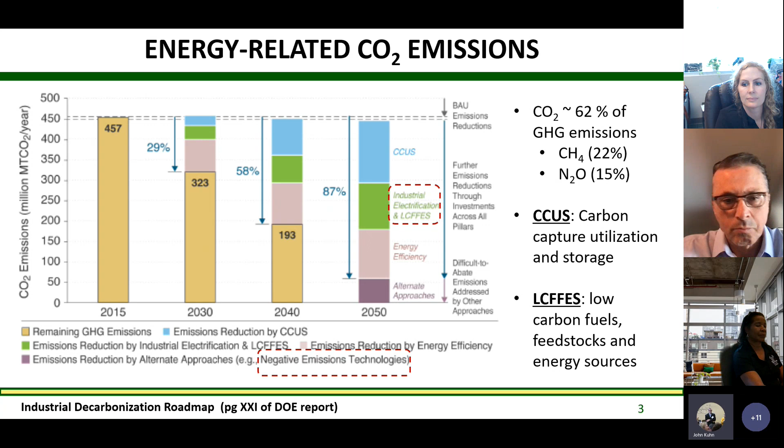One way we could go about this is with negative emission technologies. George and I had a project looking at biomass to biomaterials—carbon-based sorbents from biomass, or ways to make materials out of carbon that would otherwise be in the atmosphere, reducing overall carbon emissions in a negative sense. So there are some interesting things you can do there.

This shows the breakdown by industry of where emissions come from—chemicals, refining, and a lot of manufacturing are among the top several. These are all industrial type things, usually large scale facilities where you can have a big impact if you can apply technologies there.

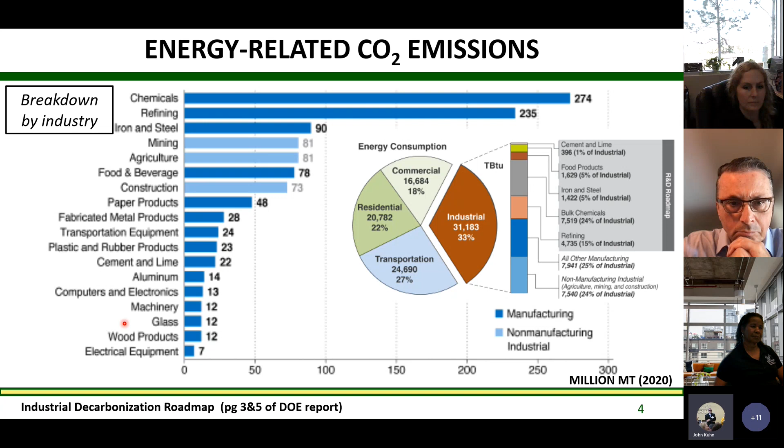But there's also a number of other things down the chain where you can have impact on overall CO2 emissions. They're not necessarily what we think of as either industrial or transportation, but a lot with commercial and residential parts. So there's a lot of work that can be done with these areas.

One thing that comes up a lot is the hydrogen economy. That's another report that came out recently, and they update these quite frequently. The main idea is grid-based electricity with renewables, or fossils with carbon capture, making hydrogen and having that hydrogen replace hydrogen that would typically come from non-renewable sources like natural gas. That'd go into making ammonia or fertilizer or fuel upgrading, or just replacing this with carbon from CO2 for the carbon backbone of things like transportation or synthetic fuels.

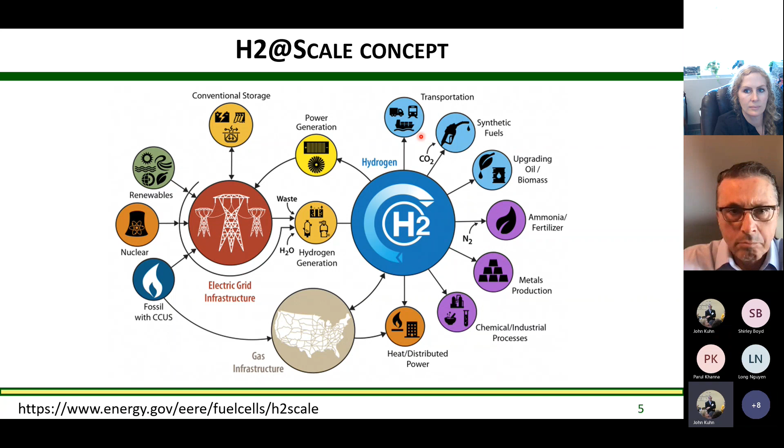It's kind of an exciting time at some level with these things, but there's still a lot of challenges for us to solve. My background is in catalysis, so I put a few slides in here, since I think much of the audience isn't going through these things frequently. But a lot of products we use, or most products we use, have a chemical catalyst used at some stage in their manufacturing. If you think of any polymer or any fuel we use, they all have catalysts used at some stage in production.

So you can improve the catalyst, which usually lowers the energy needed for either the conditions or the separations, or increases how much yield you can get per product or per feedstock you're making. There's a lot of impact catalysts can make.

What catalysts do is change the activation barriers between products from different reactions. Here's a textbook case: you have a reactant, and these delta G's are the activation energies. If those are lower, the reaction is more likely to go to one product or another - product one or two here. This is showing, for example, where one of them is 18. If you can just change this by 1 or 2 relative to each other, you can shift the selectivity, mostly from one product to another product.

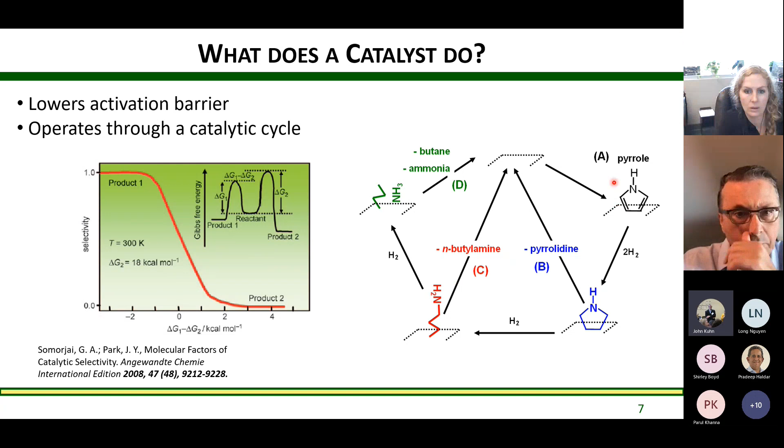And that's how these things become useful downstream, because it simplifies the separation and things like that. They also go through a cycle. This is a generic case from a publication I had earlier - you have the surface with an empty site, it adsorbs something, goes to a different product and a different product, and each one makes a circle to go back to the empty site. So it gets used every cycle, but it gets regenerated, and then you get whatever product - in chemical engineering we just call them letters typically, A, B, C, D, whichever one you want.

Catalysis has had a large impact - several Nobel Prizes have been won for it over the years. The most recent one is Gerhard Ertl, about 15 years ago now, from Germany. One of the things he won it for was understanding the fundamental catalytic chemistry of ammonia synthesis. After he won that award, he wrote a paper referenced at the bottom here, making the case that the population increase over the last 100 or so years was related to ammonia production from the Haber-Bosch cycle, enabling us to grow crops more efficiently per land area to support the population base.

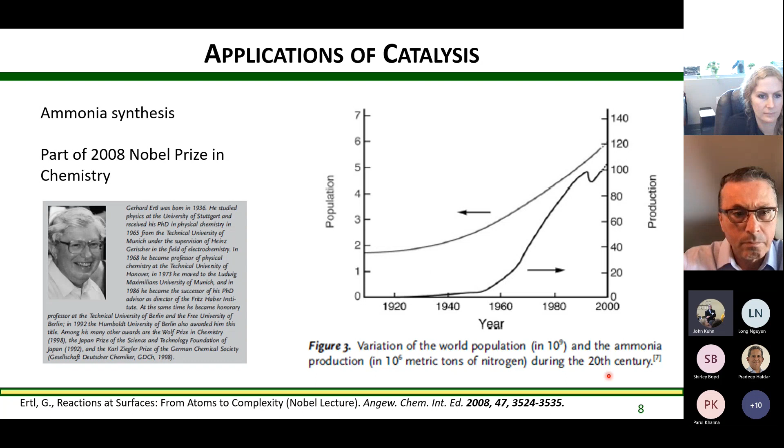So let's look at the big picture for a lot of these things in chemical engineering. At least we're trying to take cheap and abundant feedstocks and make products out of them, and we're focusing on this reaction step primarily. My main part I'll talk about is the catalyst for those reactions today.

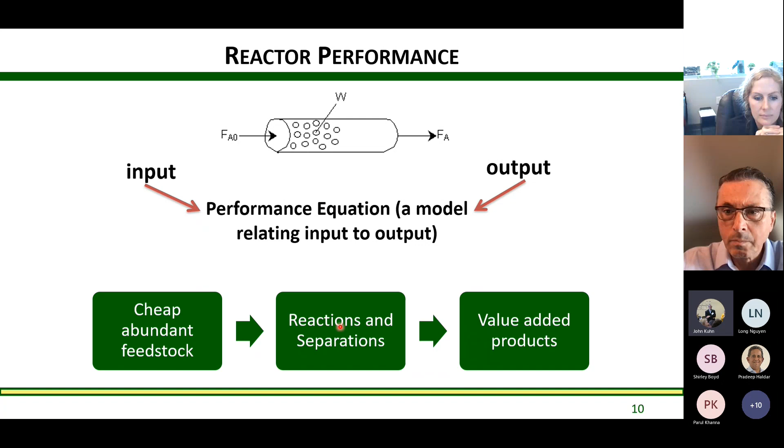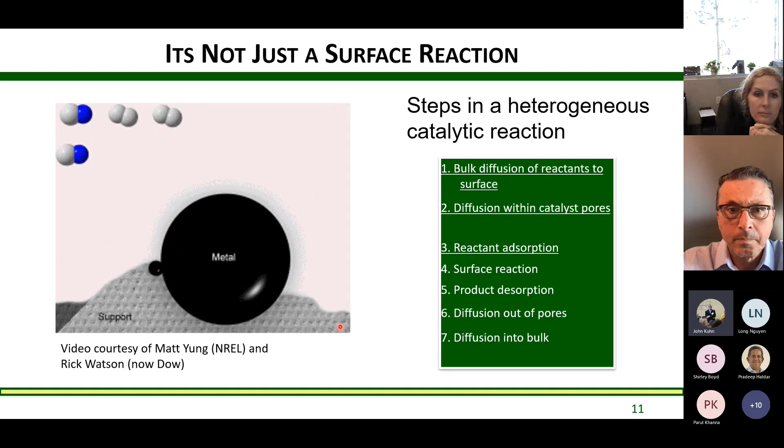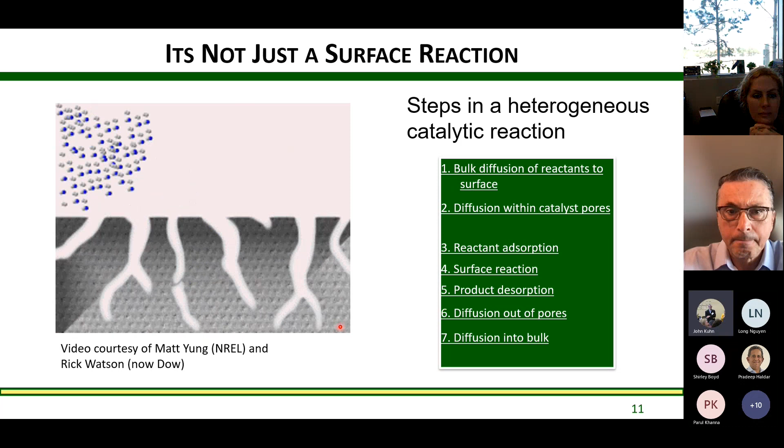These are solid materials, so there's a lot of chemical steps taking place, all at very small scales. This shows a depiction of how reactant molecules can diffuse into small pores, hit metal sites, react, and then diffuse back out. We're often studying a set of these relevant time-frame steps in our lab, usually on the small scale, and when we find successful things, we scale up to the next level, which I'll talk about later. Feel free to type questions in the chat as I go through this.

One area I mentioned was direct CO2 conversion. That's been an area we've looked at in the lab, with the idea that the hydrogen would come from electrolysis from renewable fuel sources. We've been working on complex perovskite-type oxides for this, where they can convert CO2 to CO, which you could use as a feedstock for different reactions to make any hydrocarbon product out of it. It basically stores the energy in hydrocarbons from intermittent sources like solar or wind that would be making hydrogen from water, so you get a closed carbon loop.

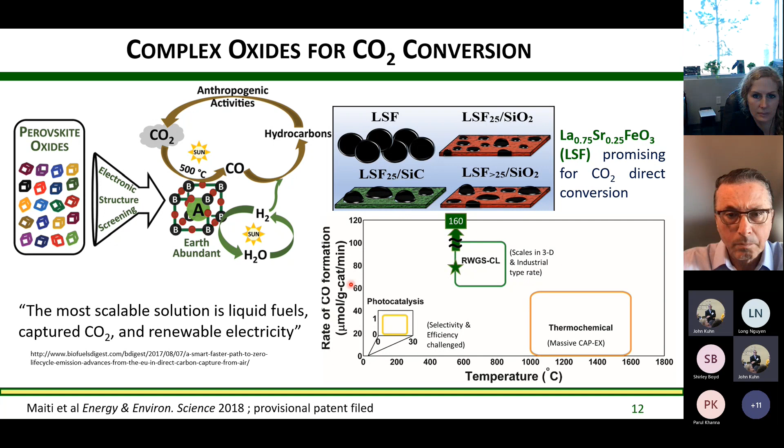This is one of the big challenges as we move toward reducing carbon emissions directly into products. Our technology is shown in green here, which balances conditions—how much energy input and thermal needs you need to balance versus what rate of product you get. That's one active area that Venkat Bhethanabotla in my department and I have been active in over the last 5-10 years.

I mentioned photoelectrocatalysis, another area I've dabbled in. This is interesting in that instead of using thermal energy, for the photo part you're using light energy—direct sunlight as the energy source—such that you can bypass heat-based processes where you have a lot of intrinsic heat losses. This is more futuristic, but ideal as we move toward low temperature processes that can be operated intermittently off renewable energy or electricity sources.

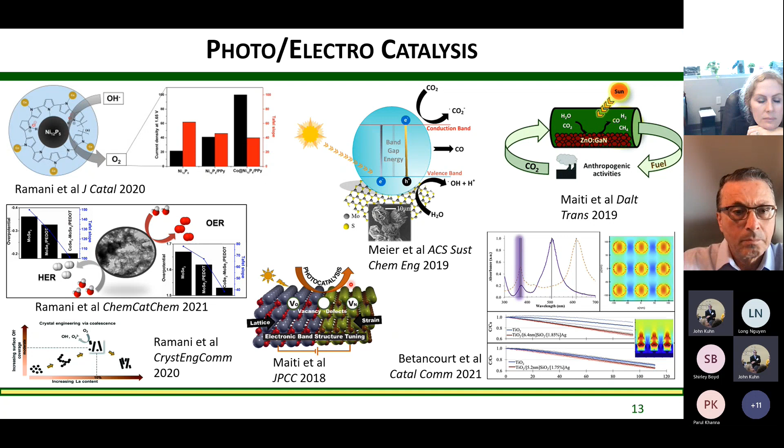That's another direction where the field will probably be moving much more in the next 10 years or so. That gives a little background about what I've been up to, and for this I'm going to spend the next half hour or so talking about biogas and what we've done in that area.

Biogas is shown here—it's about half methane and half CO2 on a molar volume basis. The good part is methane is a nice chemical to work with, relatively simple compared to all the complex crops you might work with for biomass. The downside is gases are usually much lower concentration than solids or liquids, so you're working at smaller scales, and you're basically working at half the energy content of what a lot of people try to do with natural gas, since it's only half methane instead of mostly methane.

So you have distributed biogas with only half the energy content, so there are challenges trying to do chemical conversion of this compared to using fossil fuels. The upside is we're trying to make diesel out of it, and very often this is made at places that use diesel, so there's a chance for a circular economy. Another upside is since it's distributed, these are often smaller scale, so often they're being flared just to prevent methane from being emitted into the atmosphere. So there's some low-hanging fruit to make chemicals out of this, since energy is being wasted anyway.

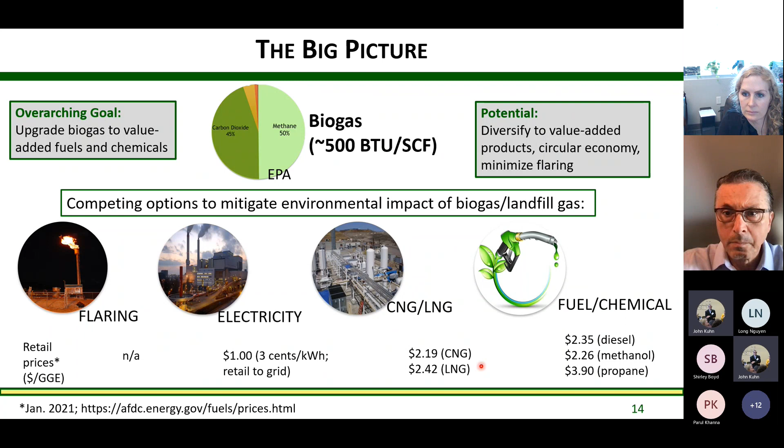Very often there's some challenge with this. So one reason why we have a lot of biogas in the United States is food waste. This term here, if you're not familiar with it, is organic fraction of municipal solid waste. The U.S. generates about 350 million tons of waste, depending on which source you look up, EPA or the Environmental Research and Education Fund. They're different by a certain amount, but about 25% of that is food waste and yard waste and other organic compounds, and they decompose when you bury them in the landfill, becoming anaerobic when you put the ground cover on them. So this is where all this biogas comes from.

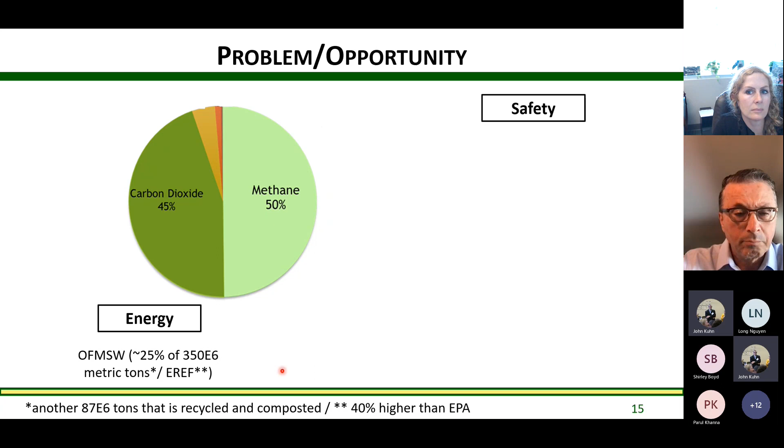So there's a large opportunity from the energy standpoint that could come from this. There's also safety concerns, since you have methane coming out of the ground at these places, which could cause fires. Landfill fires are fairly common, so it's not the safest thing. The other part is the environmental aspect. Landfills are not the top, but one of the top sources of methane emissions in the United States.

Another challenge to look at is what the contaminants are in landfill gas or biogas. There's some listed here. Primarily for what I'm going to talk about, hydrogen sulfide is one that's a concern.

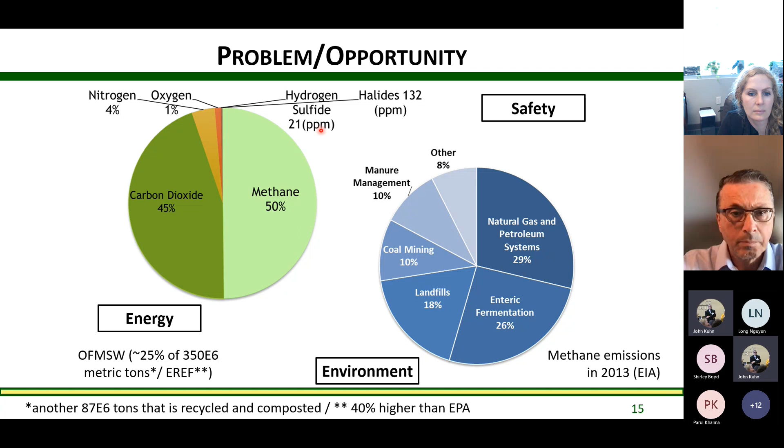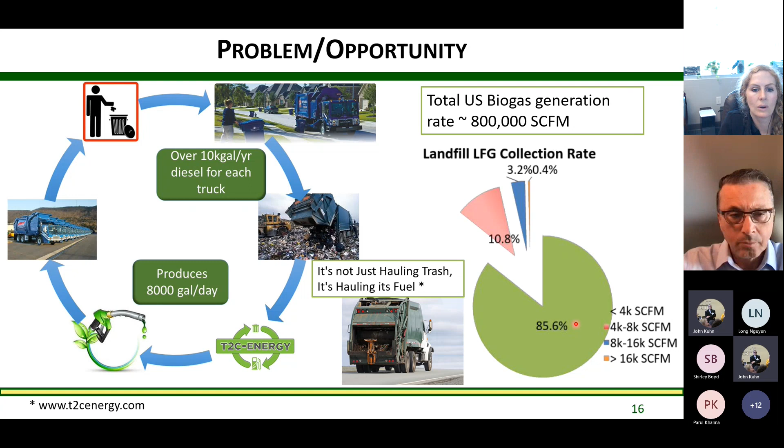And so I mentioned the circular economy. This just shows that in a little bit more detail from what we present sometimes for the startup company. Very often you're hauling the waste, and it just goes around the circle. You can have the source where you're collecting the waste, which is where you might be making the fuel and also restocking the truck. So there's potential there for a nice close-knit market. A lot of these are small scale, on the order of 4,000 SCFM or lower. Other places you get biogas would typically be ag waste facilities, which would also be very diesel heavy, and wastewater treatment plants, which again would be a place where diesel fuel could be distributed from.

Plastics and microplastics in waste has been in the news quite a bit lately. I'm only going to cover a few things here. If you want to get more into how much plastic has been generated and wasted, this paper came out a handful of years ago describing how much plastic has been produced and how much was going to be produced. These numbers seem gigantic, but I'll put this in comparison to diesel fuel in a minute. The sad part of all this is only 9% of all these plastics have been recycled, and most have been landfilled. Very little of it is biodegradable plastics.

The reason I put this in context is because sometimes it's hard to compare these scales. We're talking about 8,300 million tons versus 100 million barrels of crude oil per day. That's roughly how much is used in the world, 25% in the United States. This ends up being about 4,500 million metric tons per year of liquid fuels being used from crude oil - that's per year. This is like the history of plastics, and they're about the same value. So just how much fuel has been used ever, and all that's been burned, the CO2 ends up in the atmosphere is just a gigantic amount. And again, very little of it has been renewable fuels to date at this point in time.

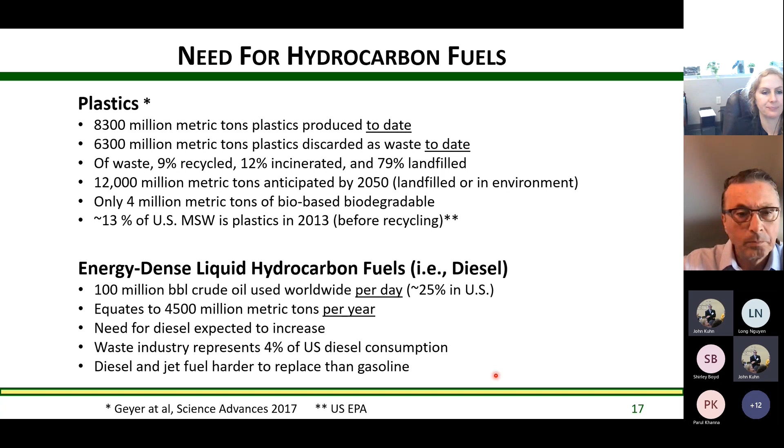And the big topic right now is SAF, sustainable aviation fuels, and that's one step harder than diesel, just due to the complexities of the fuel.

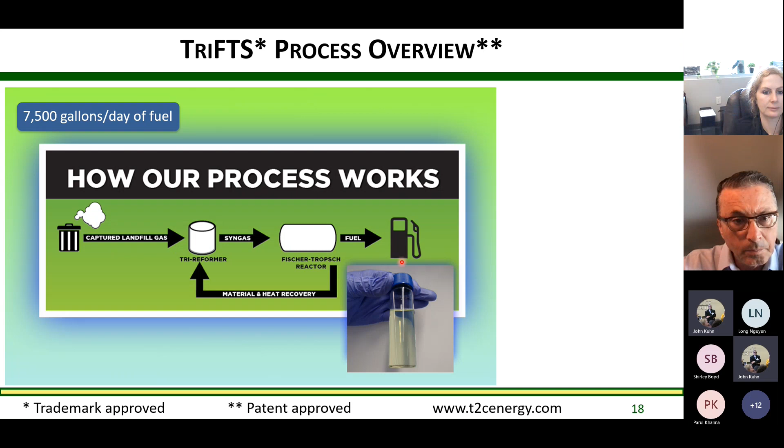So what we're doing is taking that captured biogas and doing a two-step process to upgrade it to diesel fuel, with some heat and energy recovery. I'm going to go through the cleanup step, these two reactor steps, and the final product, with a few more details in the next few slides.

This is the broader picture. We usually set this up in two different scenarios, as a block flow diagram of anaerobic digestion, AD. Sometimes when we work with landfills, they already have the gas there, so we can go straight to the step where the gas is collected and cleaned up, as opposed to somewhere where we have to run an anaerobic digester, which adds an additional step.

I'll come back to that a bit in the economic stage, because that becomes important, as well as some of the contaminants being different, which I'll touch on in a few places. So we clean up that biogas, and sulfur is the primary culprit we want to get rid of.

Then we run these through two sequential reactors. One unique thing about what we're doing is we're not doing any separations, other than just knocking out some water between these steps. We're running things straight through from one step to the other, which is one reason you can get a smaller footprint, helping the economics at small scale.

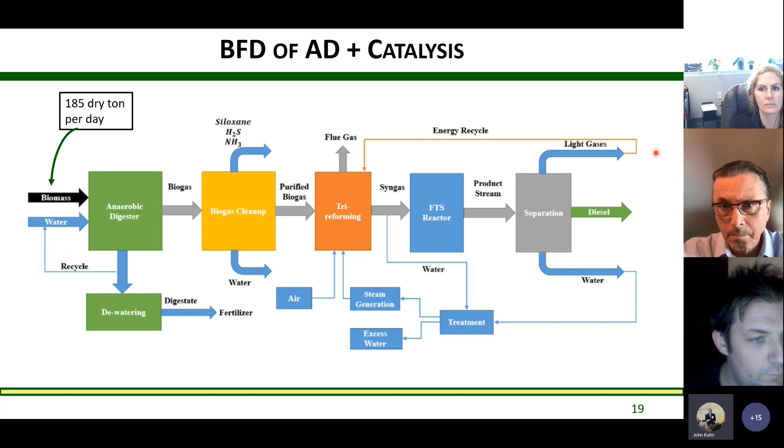We're also looking at some energy recycling, where some steps require energy input, and we use some of the undesired products that still have energy content to provide that. So there's some integration of the whole system. We do it as basically a 4-step process to clean up the biogas.

Sulfur is the first one. This uses an iron-based material, typically working off a hydroxide mechanism. We usually put the biogas through that bed first to remove the sulfur, then knock out any water after that, and then put it through a compressor if you want slightly compressed gas.

For landfills, and especially wastewater treatment plants, siloxanes are an emerging contaminant compound, so we remove those. The next step is a polishing step that removes most of the other contaminants including the halides. Then we use a sacrificial bed at the end to clean up anything else that's coming through. So we run through this 4-bed process on the raw biogas before sending it to the subsequent steps.

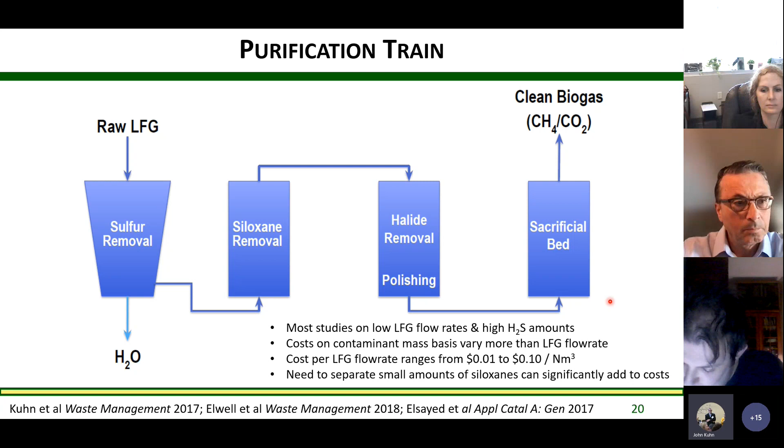There's some cost associated with that, so we wrote a review paper a few years ago on that topic—that's actually that paper over there—going through what these costs are. Since contaminant ranges can vary quite heavily from one source to another, the cost can range heavily too, depending on how much gas you're processing.

There's a lot of contaminants that could be in landfill gas. This isn't meant to show any one contaminant in particular, but just to break things down. There are various siloxanes that could be there, forming a group of materials I'll talk about more later since we've had other research on those. There are also sulfur materials, halides, and other organics, like non-methane organic compounds, that could be in landfill gas.

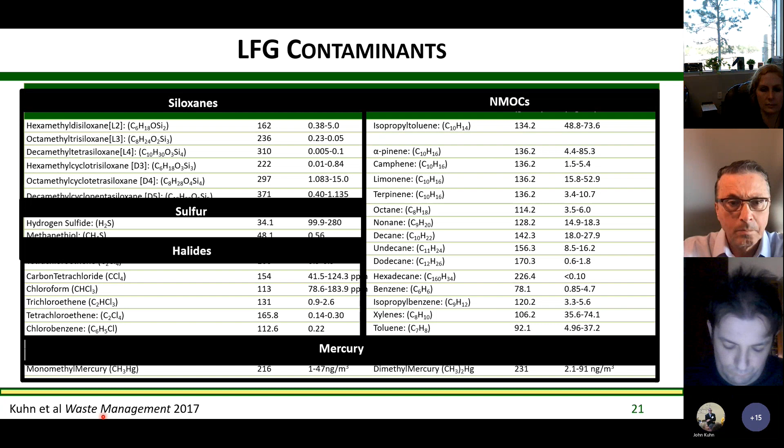All of this varies from one biogas or landfill source to another, because it basically depends on what type of garbage they take in and how they process it—mainly what type they take in. So you get a range of compounds and concentrations of compounds.

So comparing landfill gas to wastewater treatment plants, typically in my experience with landfill gas you get some number on the order of 50 approximately ppm, and then it'd be higher for other waste sources. Siloxanes are again kind of lower end for landfill gas than it might be for wastewater treatment, which is kind of dirtier gas that comes out of the anaerobic digester.

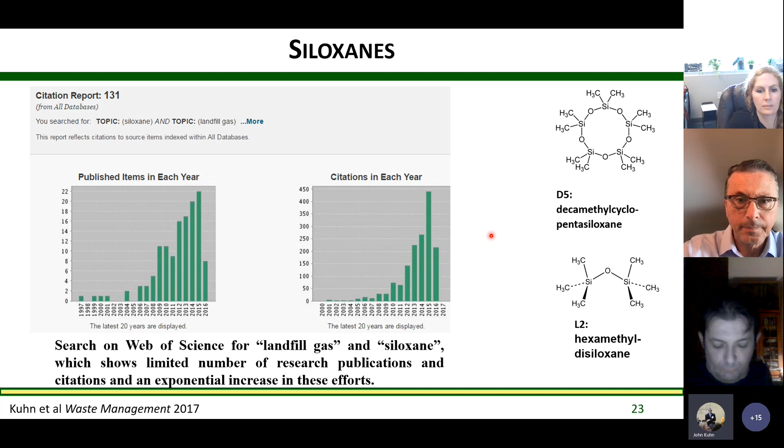The problem is when they decompose, they become gas phase. Some of the compounds become gas phase, and that's why they come out with the biogas when that happens. So they're more commonly used now, and people were not really paying attention to these more than 10 years ago for regulations. There's just been an increase of awareness of these for waste treatment over the last 10 years.

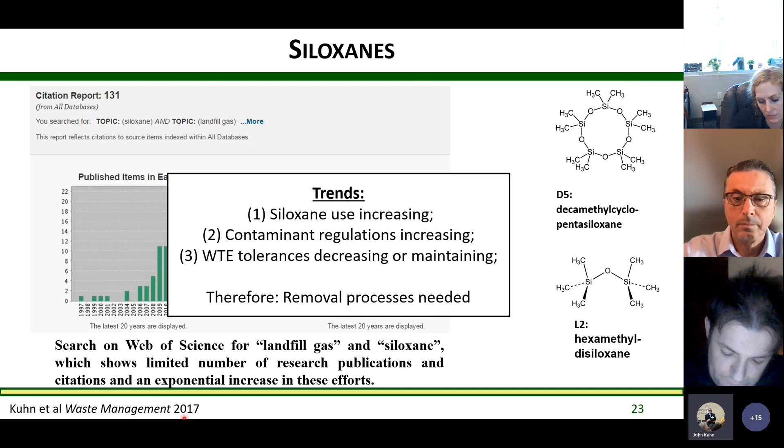In particular, I don't think I put a slide in here related to it, but manufacturer warranties, like if you're trying to make electricity, you'll have maximum concentrations you're allowed. In many cases that's in, I think, that review paper for at least what was in existence a handful of years ago.

So we looked at some accelerated tests. Since these concentrations are fairly low for what might happen to a catalyst, we can't really run really long tests, so you can kind of see that here with the abbreviations. We added siloxanes at whatever concentration would be there normally over the course of weeks and months, and we added it all at once and looked at the material property changes of the conversion, which I'll show on the next slide.

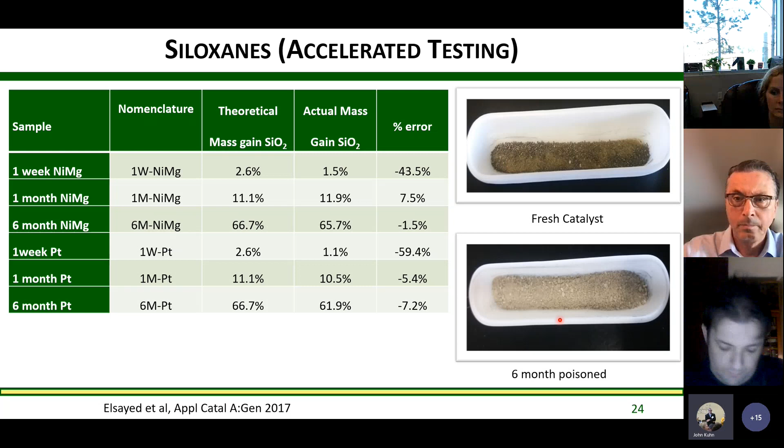You can see, since these are silica based, when you add a lot of silica to the darker catalyst, you can visually see it's there because of the lighter color. There's a lot of information here, but the conclusion is, if we're comparing these fresh materials in both cases for a couple sets of catalyst, the lower number is better. You can see as we add more siloxanes, all these numbers increase down the chart.

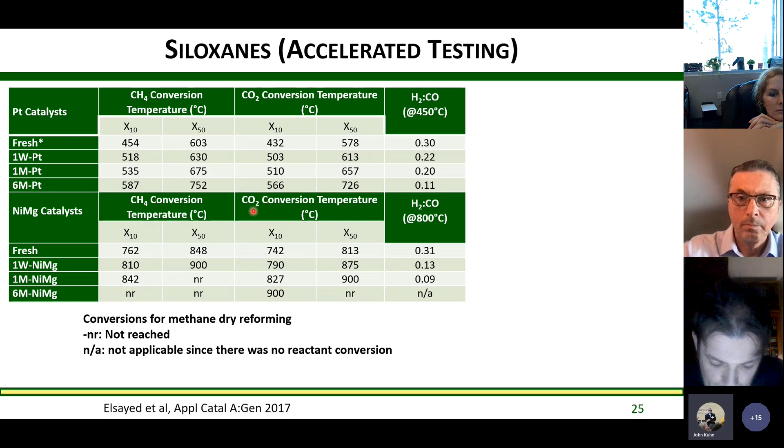If we do some calculations based on how much siloxane may be there and how much can be added to the catalyst before it completely kills it, it basically means we need to remove almost all the siloxanes for them not to have a substantial effect. So that becomes a key contaminant for a lot of these processes to upgrade - you have to remove the siloxanes. It's kind of a take-home message from some of the studies we did.

We also did some life cycle and economic studies, comparing siloxane removal from landfill gas - this is just for making electricity out of it - looking at how often you would need to remove those. Probably the main part is this siloxane removal unit. So basically you put some there that are large enough for 6 months and have some downtime to replace them, or you put two in parallel so they can operate continuously, or you just don't put anything there and do maintenance on the equipment every time it breaks because of the siloxane buildup.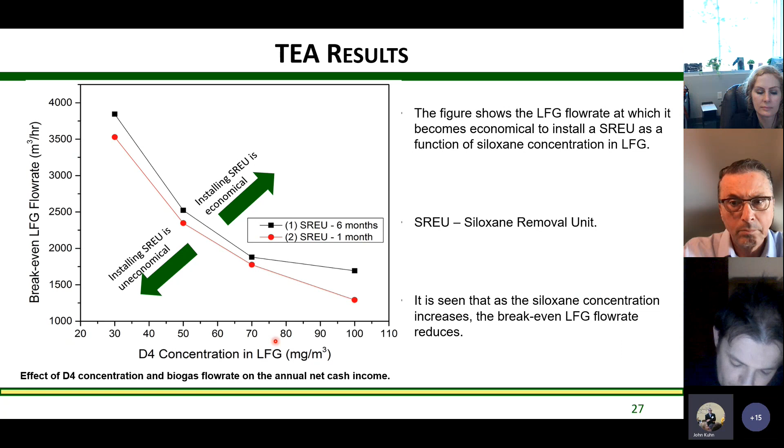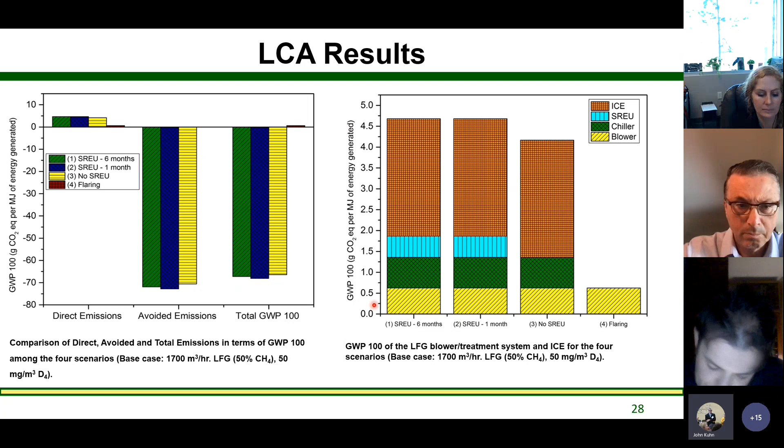We did some life cycle analysis as well. We didn't see too much difference between what type of removal unit we used, but in all cases they were much better than just flaring. Probably the right graph shows that more easily, that we have a lot more potential because of the sales or use of electricity, to not have an impact on the global warming potential.

But I'll go back to what our product of diesel fuel is, or project with diesel fuel. I'm going to walk through a couple steps - some things that are different about what we do compared to what you might do if you were just trying to take a product that works on a process that works on natural gas and scale it down.

We're not removing any of the CO2 - we actually use the CO2 as a reactant, or some of it as a reactant, to help balance out the reaction. I'll talk about that part later. We're tuning what goes into this first reactor with how much steam we add for the hydrogen, such that we can directly send that ratio into the second reactor. We don't need any water gas shift reactor to adjust this ratio, or some sort of hydrocracker to adjust ratios before the separation.

We're not doing a lot of distillation here, and we're adding oxygen in as well, which I'll talk about, but we're not separating out the nitrogen. The air separation is usually a very energy intense process that kind of overwhelms things. The nice part of what we're going to show is the fuel here - it's drop-in.

Drop-in means it can be used directly as diesel fuel in a diesel engine, and it meets those criteria. We're in the process of having that at a larger scale with engine testing as well right now.

But the good thing about the sulfur poisoning the catalyst is we have to remove it, and then this becomes a very low sulfur fuel on the way out. It's also very low aromatic, so it's a very clean fuel. The catalysts we use in these two steps are kind of the key to how we can get this to work, which I'll talk about in the next couple slides.

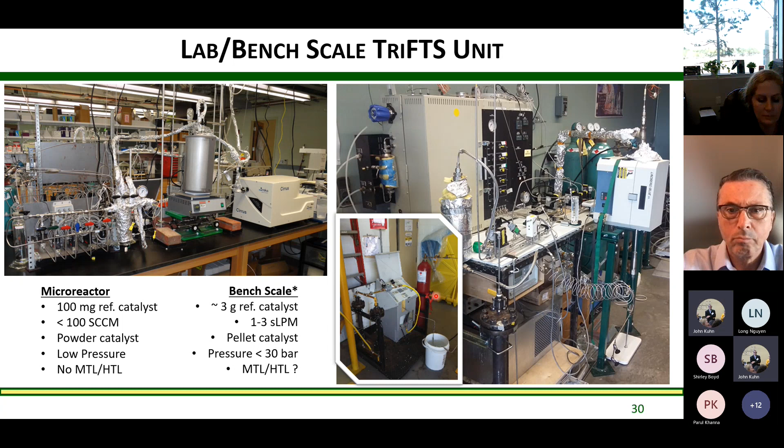So you solve a lot of problems just going up from this scale, which we could do in the lab. But we also went to a local landfill and got some gas compressed with a natural gas compressor we bought, so we could take real landfill gas and then use it to clean up and test it in the lab. So we were able to solve some of those earlier stage problems, or work with them, at the lab scale before we went to the next scale.

A little bit about the reactor part: the first reactor is called tri-reforming. Historically, methane reforming is where the name comes from, using steam. This is often used where methane's from natural gas - you add steam or water in and make CO and hydrogen. The hydrogen is often used if you were trying to hydrotreat petroleum products or make ammonia. This would be a typical process for making hydrogen.

We're not looking just at the hydrogen directly. We want to have something where the hydrogen to CO is a 2-to-1 ratio, because most polymers or hydrocarbons you want to have a 2-to-1 ratio. So we balance that out by reacting some of the CO2. If we react 1 CO2 with methane, we get a 2-to-2 ratio, and you can balance these out. If you do 2 steam reactions and 1 CO2 reaction, you get a 2-to-1 hydrogen to CO ratio just by balancing CO2 and steam. The nice thing is you're reacting some of this carbon that would otherwise be emitted back to the atmosphere if you just used the methane component alone.

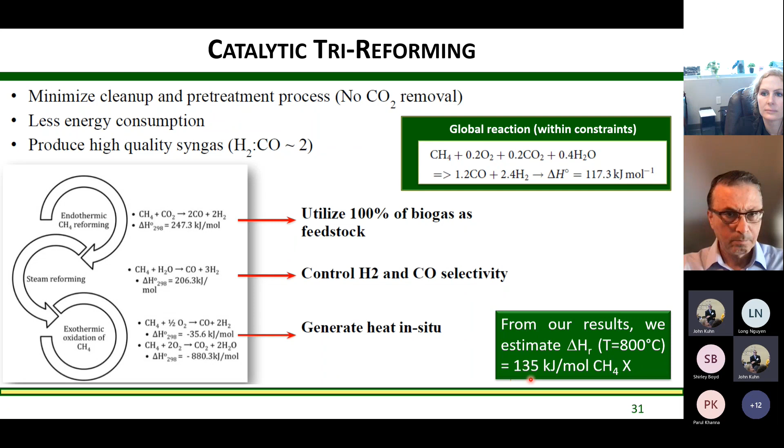Now, both these reactions require heat input - they're both positive values, so endothermic. The one way we get around having 2 largely endothermic reactions is adding a little bit of air in, and the oxygen does a partial oxidation step. It's slightly exothermic, but the nice thing is it's more neutral in terms of energy needed, and that's better than having the enthalpy needed for the heat input of those other reactions. So we can balance this out. These numbers average around 220 by reacting some 40% of the oxygen. By these mechanisms, we can get the heat of reaction down to more like 135 at typical reaction conditions, so we need less energy input at that step - that's the advantage.

Here's some of the various catalysts we've used over the years. Not too much to mention necessarily, but we spent some time going from powders to pellets because we needed those to scale up. We do some fundamental studies to understand why they're working, but we were able to tune these properties to get high methane conversion, really high CO2 conversion, in this 2-to-1 ratio range over the temperature input at these fixed input conditions. So that worked well.

These show the progression of some of the catalyst materials - we started with powders on the small scale, then went up to upgrading conditions, making this more realistic by increasing pressure, space velocity, and adding real landfill gas. As we go up, we're able to maintain the performance range we were interested in. The most important thing is getting high methane conversion, and the hydrogen to CO ratio around 2, then the higher we can get the CO2 conversion without knocking those out of balance is the next most important thing.

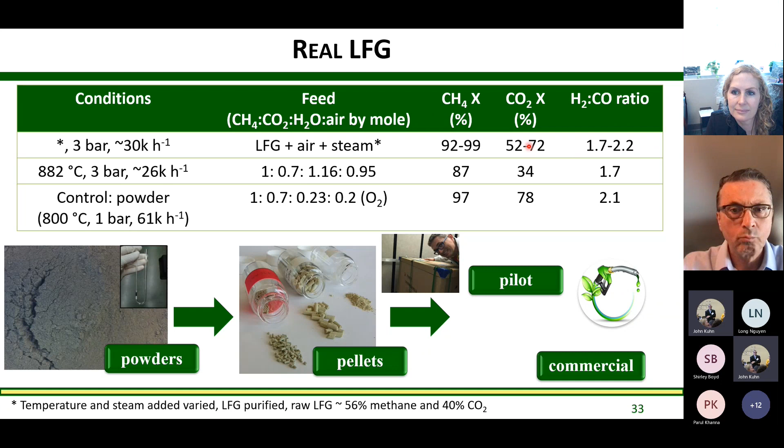And so that gives us basically the input to the second reactor here, which we worked on. I worked with Dr. Joseph, who's also in our department for this. He worked on this reaction for quite a long time.

This is interesting because you're trying to not necessarily make the most active catalyst, but make one that produces a certain product cut.

So he worked with these eggshell type catalysts. If you cut some of these apart, you'd see the cobalt is only on the outer 20% approximately of the shell, which is why they're called eggshell catalysts. That thickness allows you to control the length of hydrocarbons you make.

Typically we're trying to look at things that are C5 plus, because anything C5 plus is condensable, so at least gasoline at that point, as opposed to gas phase products. In the second step, we're able to convert CO and get this range of products, without making too much CO2, with a lot of liquids produced.

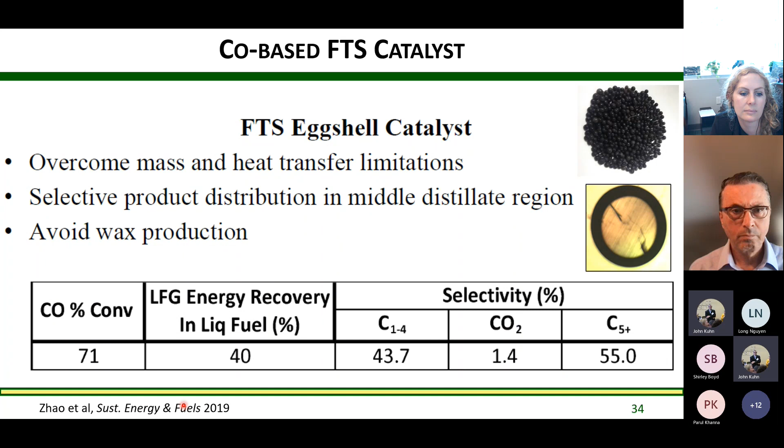This ends up being about 40% of the energy content recovered to the fuel. We can push this higher, but since that earlier step still needs energy input, we're okay having some lighter products we can burn to provide the energy for that step. These are all larger lab scale studies from this paper, which people can look at for more detail.

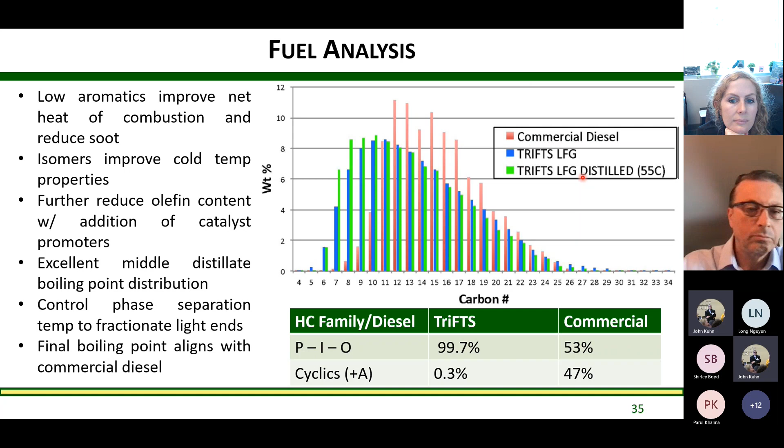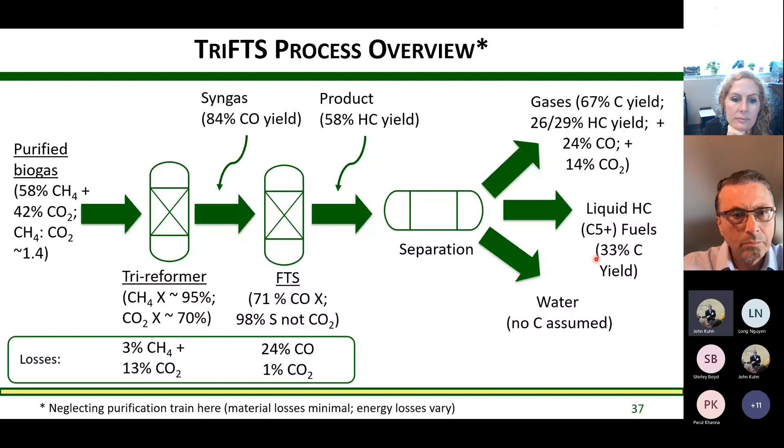I probably should skip that slide. I do get some questions about economics at times. The economics are a little tricky to answer because there are a lot of credits, and the credits change — they're market based, so they change frequently.

Kind of the main idea is, if there are no credits — a renewable identification number, or RIN, would be the credit you get for selling the fuel — you need about 900 SCFM to be profitable. This would be a little bit lower than average.

By mean or median landfill size, that could work. This is selling at a certain fuel price, I think about $3 a gallon — this number is probably from when this paper came out. But if you applied these RIN credits to the fuel, you might get $4.50 a gallon on top of the sale price.

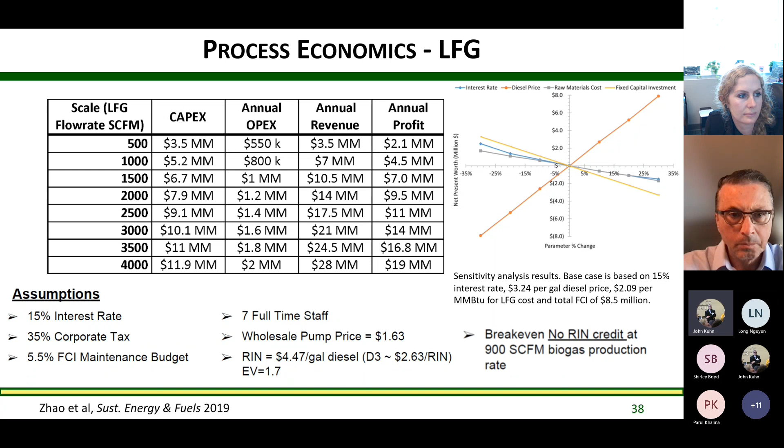These credits can change pretty rapidly, so we always put a grain of salt on what those numbers are. But we can still be profitable without them — those credits just make it very, very advantageous.

Those numbers were all based off of just having landfill gas available. We can redo some of these calculations if we start with biomass that would be hauled to an anaerobic digester, basically adding the anaerobic digestion step on top of the other parts I talked about.

We can compare some of the costs for that. I can go through this, but anaerobic digesters have pretty low rates and are pretty gigantic, so the capital cost becomes a pretty dominant part of everything.

I like looking at this because it puts the whole waste-processing-to-fuels picture in perspective. You always have to take into account what we're paying, or what we're being paid, to take the waste on the front end. Landfill operates on a tipping fee, but with most biomass you have to buy it and have it transported to you, which shows up as a feedstock cost per ton. This paper was in a journal requiring all SI units, that's why you're seeing tons and liters, dollars per liter, and break-even cost of diesel instead.

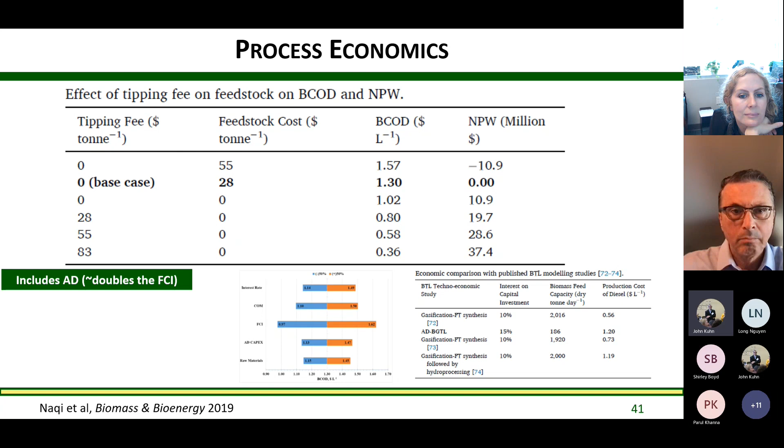So the top cases were where we were paying to take the waste, then we did a neutral case, and then cases where we were being paid to take the waste and process it. You can see that's a gigantic impact on the numbers. If you want these in dollars per gallon of fuel, just multiply by about 4. So if there was something here, you'd be in the 4 or 5 dollar range, but it gets pretty low if you're being paid to take the waste and process it. There's a wide range of scenarios for how the finances and business side actually works, which is interesting in itself.

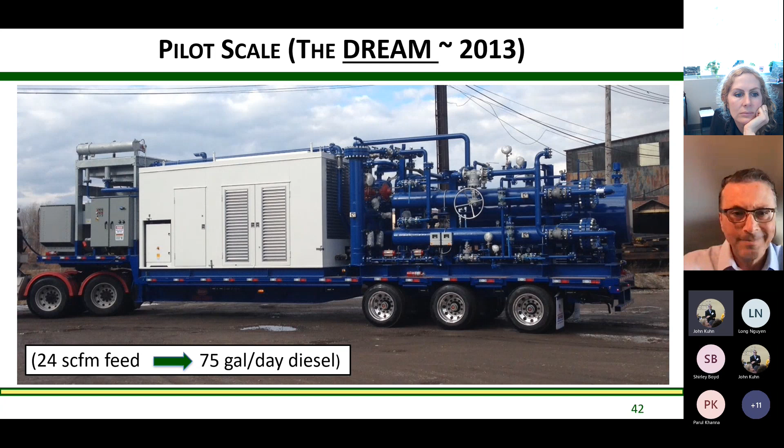In the last couple of slides, we worked with somebody on the advisory board of our department when we were getting started with this. You can see it's from about 10 years ago—he sent us this picture and said we needed to prove it by getting something to this scale, taking it around, and showing that it works. So we started working toward that, and we spun the company off.

It took us a few years to get things out of the lab. This is a company in South Carolina that specializes in this. These are some of the master's students who worked for the spun-off company, starting the design—it took about 5 years to get to scale. This system is 24 SCFM, so it might be about 1/100th of what a landfill operation would be.

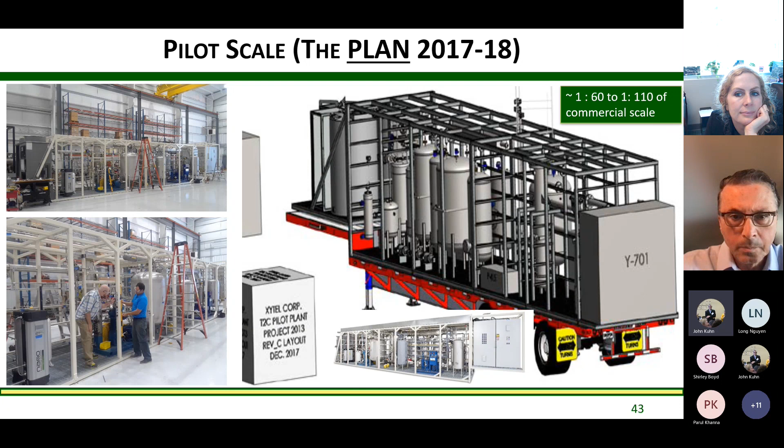We took it to a dairy farm first. The digester there is about the size of a football field and about 20 feet deep, so it's pretty gigantic—you can see some flares there. We siphoned off a side stream of their fuel for our first test a couple of years ago. This is all dairy waste, by the way. Everything worked pretty well, but we worked out a lot of kinks on the pilot system at that scale.

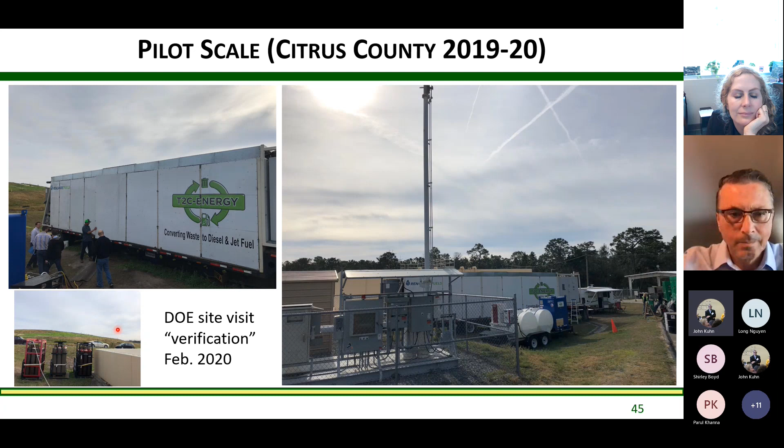We were lucky to get some DOE grants for this project after that, so we did the next round of tests at Citrus County, at their landfill. We ran 7 months of testing there. One issue with catalysts is that we can never really test for 7 months in the lab, so being able to run 7 months on stream gave us verification that the catalyst works at least that long. That was a good, successful test.

Then we worked with Pinellas County—some people might be familiar with South Cross Bayou. We ran tests there on their wastewater facility late in 2021, about a little over a year ago now. They collected everything in this container, and we took a side stream off of it—you can see it in the picture. We're now at the stage where everything has worked well at the pilot scale, so we're looking at moving it forward to the first commercial facility.

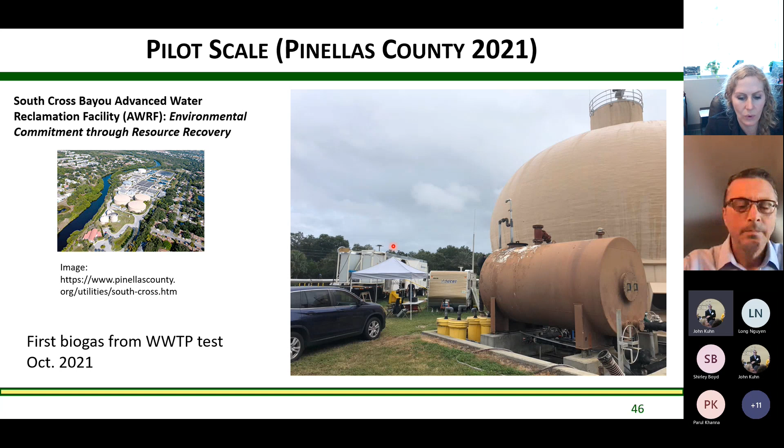I think I've gone about as long as you wanted, so I'll skip through the rest and leave it here with some of the funding sources we had. I'm happy to take any questions, by voice or in the chat.

Great, John, thank you so much. It's very nice to see that you are moving now past the pilot stage, and I assume you're raising money for building the first facility.

Yeah, we're looking at a couple of different scenarios in the US and elsewhere, so the economics are a little bit different by country, I guess is a good way to say it.

We would welcome questions from the audience. Perhaps I can start by asking: you spoke about the catalysts, and those catalysts often contain rare earths like nickel, for instance, which are also in demand these days and will increase their demand over the years for renewable energy systems like batteries and photovoltaics. Do you see any cost or supply chain issues as that demand is increasing?

We've certainly seen, since you mentioned nickel prices, it's kind of a catch a little bit. Nickel prices have certainly increased a lot over the last 2 years, but not so much cobalt, which is the other primary metal we're using. So it has an impact, but maybe not as much as if it happened to cobalt, it would have been worse.

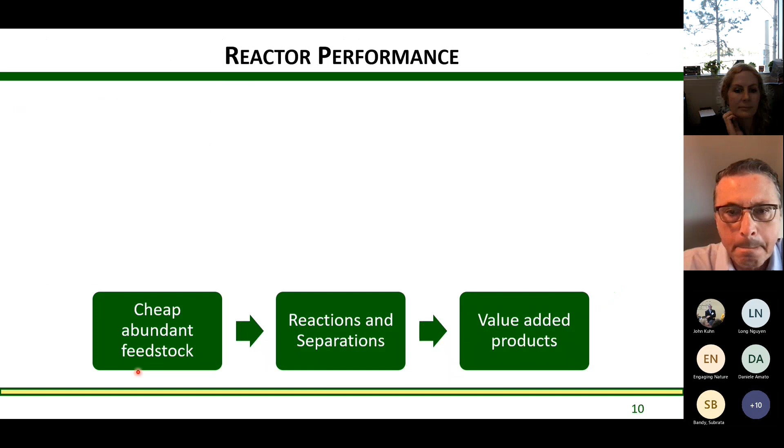I had a number there, but it probably was in two different units. So it ranges from this to this, like order of magnitude, kind of in that scale. The problem is I probably didn't have numbers in normal cubic meters. It might be 70, might be a typical value, 70 per hour. So you can multiply that out, but it ends up being fairly minor.

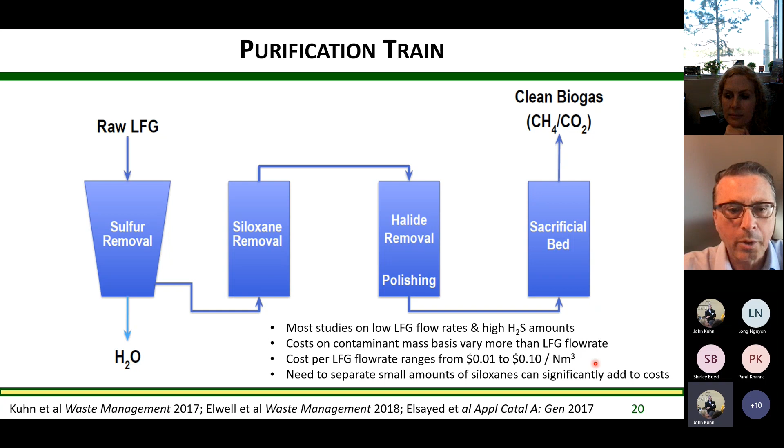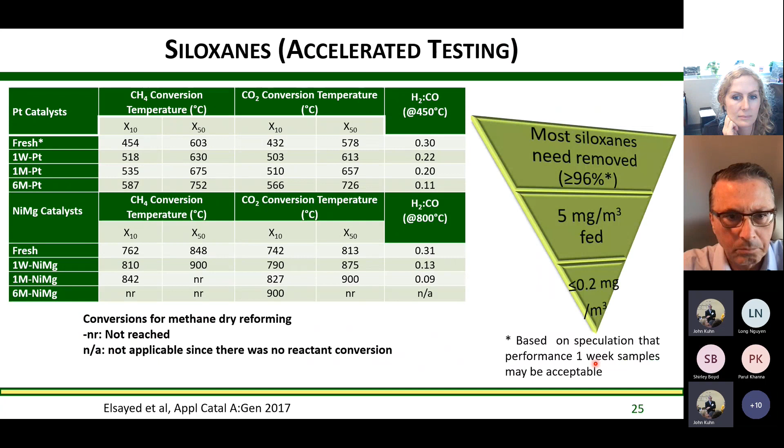I think I had one slide. Actually, that probably was the wrong slide to pull up for that, but I think I skipped through it very quickly. Yeah, so these are the capital costs or the materials costs, but we're talking about tens of thousands of dollars per year for the catalysts. Yeah, so like 163 and 19,000 -- oh, these are for the adsorbents for the cleanup.

All right, any questions? Anybody from our students or faculty? Everybody's very quiet on Wednesday afternoon.

John, as far as commercial development, do you envision co-locating your system at landfills or anaerobic digestion operations? One place we're talking to has that capability -- basically they have two things pretty close together and they're able to combine to basically increase the size. I think that's what you're getting at, right?

Yeah, so co-locating of anything -- this becomes, in certain places like California, much more about diverting waste and doing AD before they put it in the landfill, rather than using the landfill as the AD. It's kind of the same idea where you could co-locate two things because you're processing the waste and you have the older waste in the landfill coming out at the same time, so you combine them. The delay of biogas coming out is on the order of like 5 years or so from when you put things in -- it's a slow process.

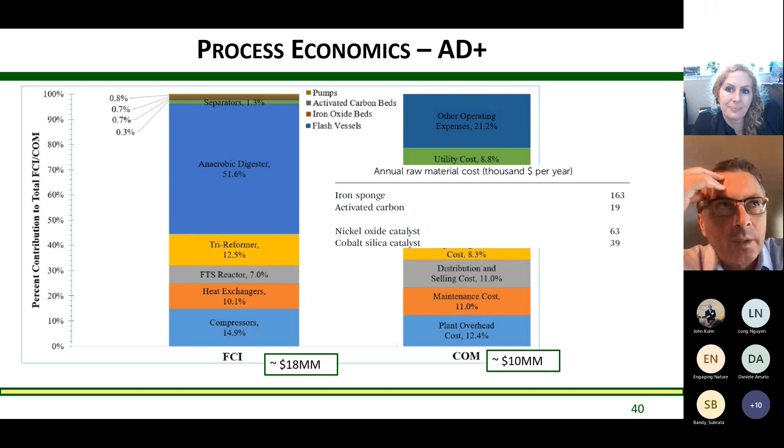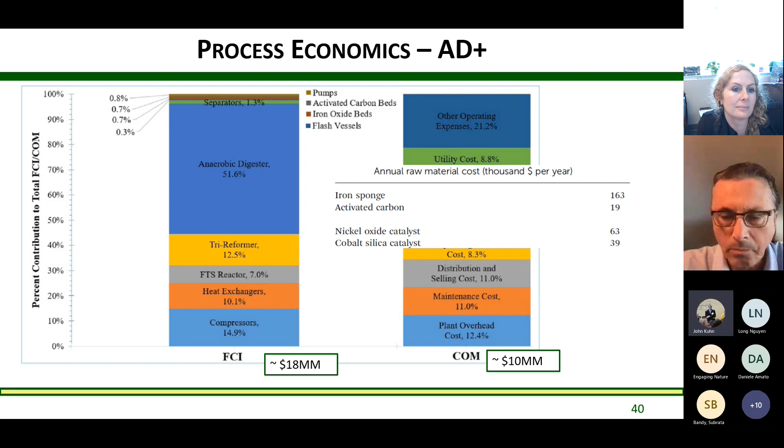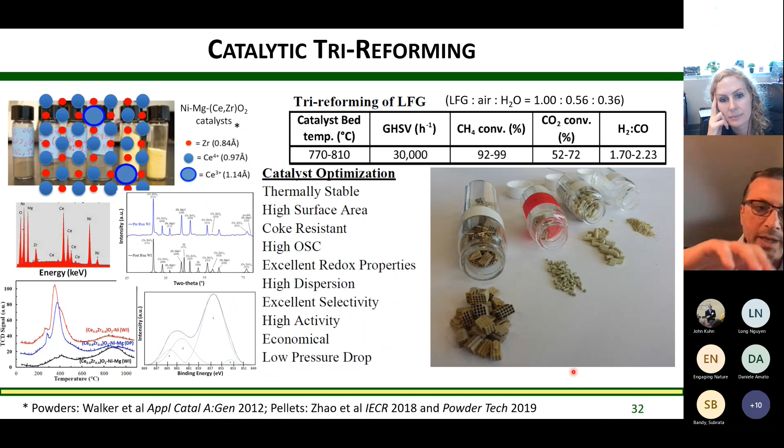John, one more I had. In one of your diagrams, you showed diesel coming out as the main product, and then light gases, I remember you called them. Do you see any use for those if you were not to recycle them back into the process? Typically we use these light gases, we burn them for this endothermic step. So you use them as a source of heat back into that. Things discussed for similar processes are if you could use renewable electricity for electric heating instead of a gas burner, then you could reuse these gases, either recycle them or make LPG out of them. For our particular thing, we haven't looked at that too much, because we're not doing the air separation, so there's a lot of nitrogen in that stream. We're thinking the cleanup would be costly, and it's probably not going to be beneficial.